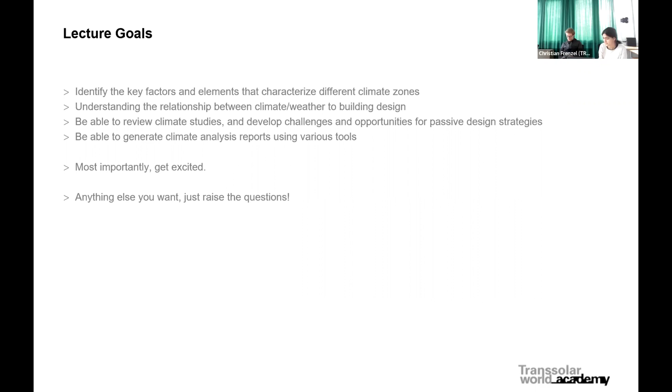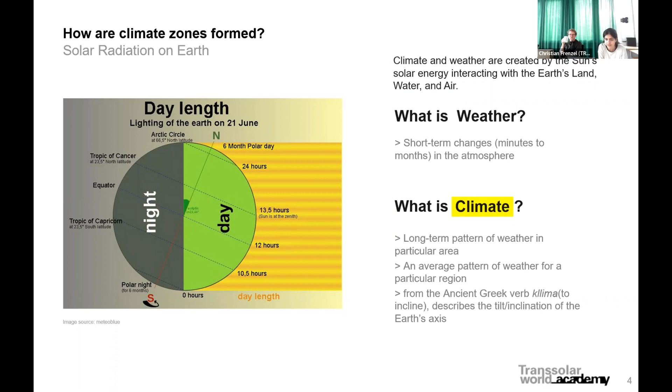Climate is a long-term pattern of weather in a particular area, while weather is a short-term change that happens from minute to minute or month to month in the atmosphere. So basically, the average weather pattern defines the climate of a region.

There are very dynamic factors that influence the climate system. It's comprised of the atmosphere, which is the air, the hydrosphere, which is all the water bodies like seas and oceans, the cryosphere, which is the ice, the lithosphere, which is the ground, rocks, and tectonic plates, and the biosphere, which is the ecosystem. So how the plants and biodiversity affect the microclimates and climate of a region.

To understand climates, we break it down into certain measurable physiochemical values, which are solar radiation, air temperature, precipitation, evaporation, humidity, even population, wind, and pressure.

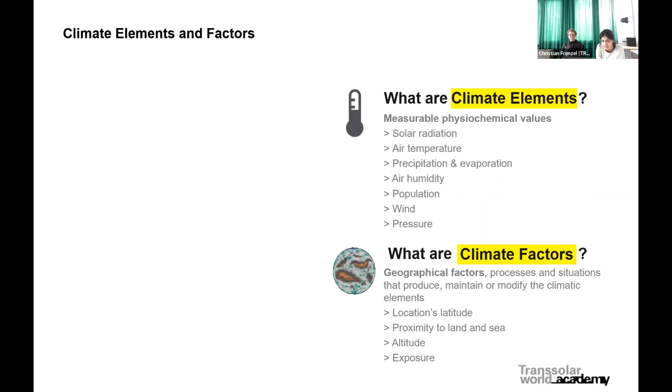When we understand these values, we are able to tell what the climate of a location is like. We are also dependent on certain geographical factors like latitude, the land, whether it's close to the ocean, the altitude, whether it's a mountain area, a desert, or a plain, and exposure to other factors such as whether it's an urban area or a forested area. So we'll take a closer look into all of this in detail.

Based on latitude, as we all know, we divide the climate into tropical, subtropical, temperate, and polar zones based on radiation. For example, there is maximum solar radiation in the month of June, and that's the summer months, and because of the rotation, this is how the climate regions are formed.

The polar regions get less sun, and the regions which are closer to the equator get more sun.

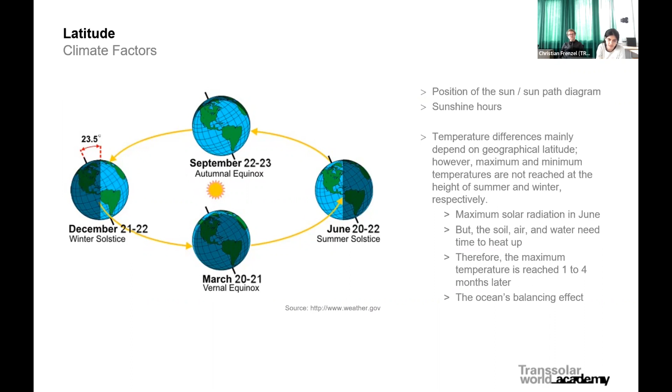In addition to this, there is constant exchange happening between the sea and the land. There is wind generated because hot air rises up after being heated on the land, and cold air flows in from the water, and this creates wind movement patterns which affect the climate.

In addition to this, altitude affects the climate. Altitude decreases pressure and makes the air rare, and it increases wind. It also affects the rain patterns of the area. There are windward sides and leeward sides of the mountain which generate monsoon winds.

Then there are other factors, like whether it's an urban area. For example, if everything is concretized in a city, it will generate a different kind of microclimate, known as an urban heat island.

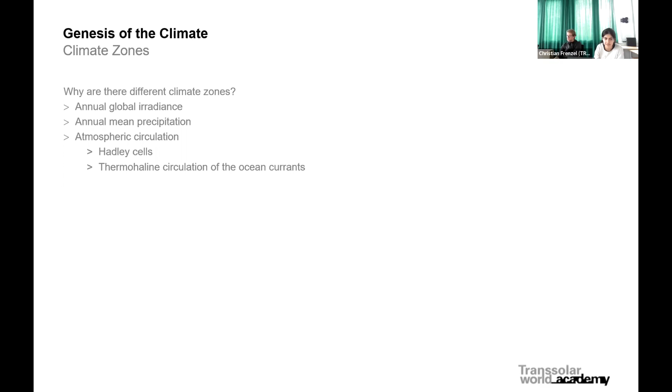So what really generates the different climate zones? We can break it into majorly 3 parts: the global radiation that the Earth receives, the precipitation, so the rainfall or snow which the Earth receives, and the atmospheric circulation, which is the wind.

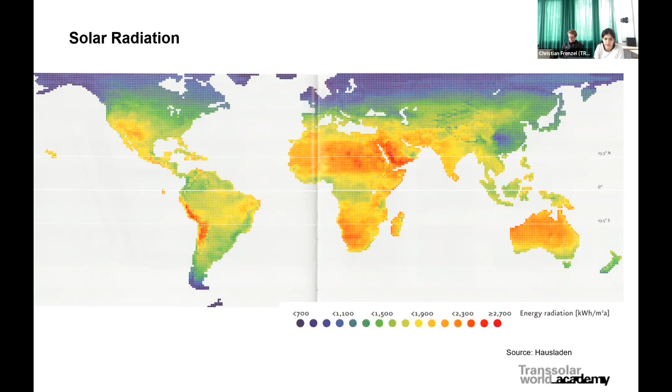When you overlap these 3 parts, we predominantly get these maps. This is the map of solar radiation on the Earth. You can see that close to the equator, it receives the most sun. As we go away from the equator, it gets lesser and lesser, and towards the top and the bottom, which are the polar areas, it's much less.

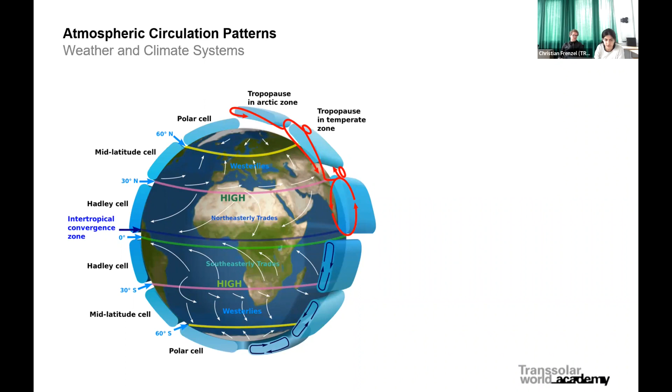Overlapping with that, there are our trade winds, which govern the rainfall, monsoon, and temperature flow of the entire globe. For example, looking at the African continent, you can see how in a section the trade winds flow from the north to the south, and where the warm air rises up, the cool air is always taken in to cover up that space.

In addition to this, there are deep ocean currents which also circulate the temperature in the oceans and seas. The cold water and the warm water flow in a way that also creates wind patterns, and these wind patterns then define the coastal winds and so on.

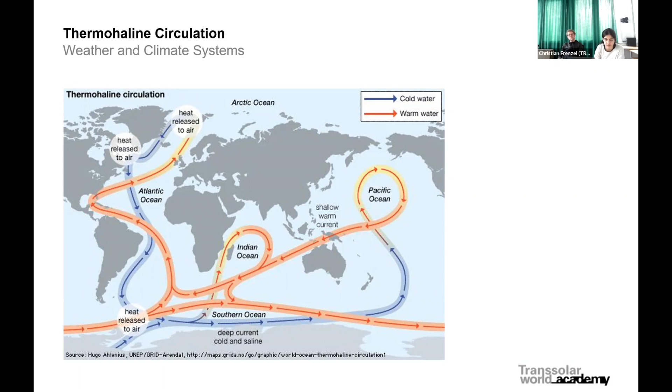So what we have based on all these layers, when we overlap, we get a detailed climate classification, broadly classified in two ways. There are genetic classifications, which classify based on the causes of the climate, for example where it is generated. These are like the Flohn or the Neef classifications. But what we use commonly is the effective classification, which is based on the effects of the climate.

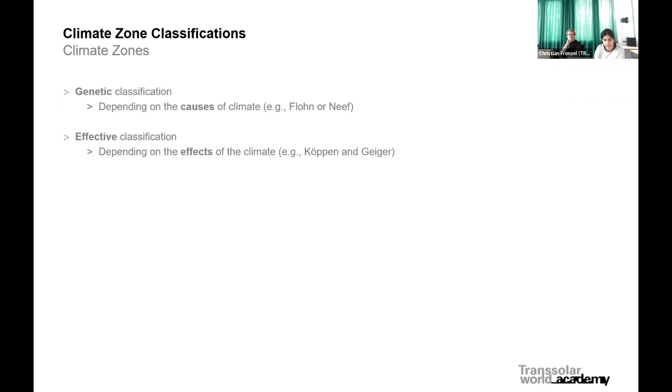So the most common one to use is the Köppen and Geiger, and this is the map of this one. According to the Köppen-Geiger climate classification, there are around 30 zones of climate in the world, from tropical rainforest to arid deserts, to cold with dry summer, hot summer or dry winter, cold summer or cold winter, dry summer, and going all the way to polar frost.

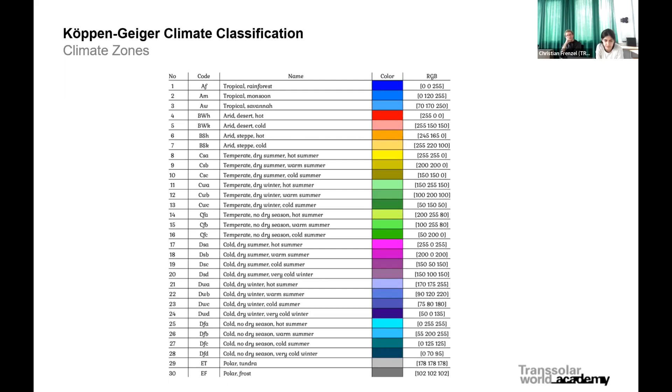So these are 30 different climate zones, and each of them creates very different and very unique characteristics in every possible way. Let's take an example and look at a broad classification. Let's remember we have 30, but just for the sake of understanding, let's take 4 broad classifications: the polar zones, the temperate zones, and the tropical and subtropical zones.

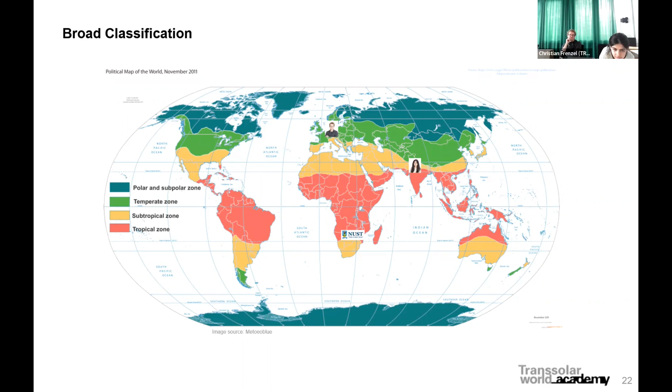So when we overlay all these layers of solar radiation, precipitation, humidity, wind, and atmospheric pressure, what we finally get is something that is a completely different geography, a different vegetation, soil, topography, and it looks something like this. You might be familiar looking at such environments in your area.

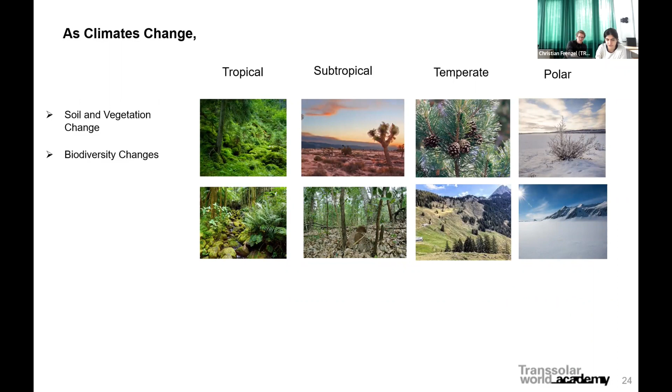And naturally, as these climates begin to change, the soil and vegetation changes. So as you know, in rainforests there are broad-leaved species, and in temperate forests there are deciduous and coniferous species, and so on, which naturally means that the kind of produce grown there, like the food we eat, also changes.

So in rainforests you would find fruits like papaya, banana, pineapples, and so on. In subtropical areas, you would find oranges, figs, dates, and so on, which basically means the food being consumed changes. So the culture, languages, everything is changing from these areas.

This also means that the natural resources available there, or the locally available materials that naturally grow there, are also changing. For example, in tropical areas bamboo grows abundantly, and in most subtropical areas you would find a lot of limestone or sandstone and so on.

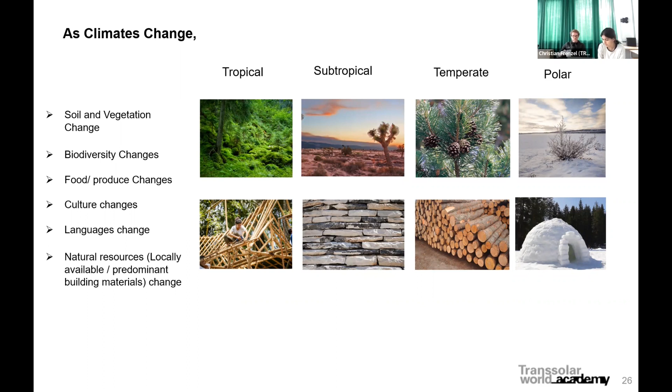And in temperate areas, there is abundance of wood, especially coniferous trees like pine wood or cedar wood. And in polar areas, there's of course ice. So predominantly in traditional buildings, people used to build with whatever was available in their immediate surroundings. That's why you see buildings predominantly made of these materials, because they were right there.

And also something that changes further is, naturally, the clothing. Our body's first response to adapt to the climate is to wear comfortable clothes, which give us adequate ventilation, protection, and so on. So if you look at someone in a tropical area, that's the clothes they would wear. In a subtropical area, they would cover their face and head because it's too sunny. In a temperate area, they would cover their body with a warm coat, and in a polar area, even a thicker coat.

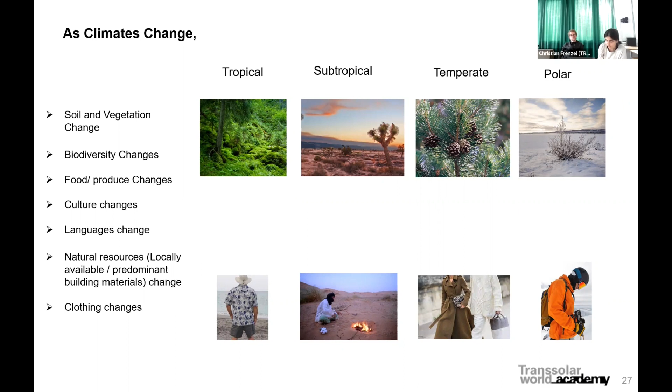So now it's time for your turn, and we want to ask you, how do you think architecture changes? And the hint is, if you look at the clothes, you'll be able to tell how the architecture changes. Please raise your hands and let us know some answers, or some thoughts or your own kind of experience.

I think it's important that we're talking about our general understanding. I'm not sure if it was you or someone else, but when you came here to Germany, it was winter time or even October time, there was a kind of hard change in clothing, I could imagine. Yes, true.

Would anybody like to take a guess or take a shot at answering? If I add to it, the interesting thing is, everybody here has this all-season kind of clothing. In winter, everybody's getting super insulated with a big jacket. And I remember a very, very huge jacket in your case, because coming from a very warm climate, the expectation is also different, or the experience of what someone is used to before when the season changes. Yeah, and here in winter it can really drop down to -10, and even extremes of -20 degrees Celsius.

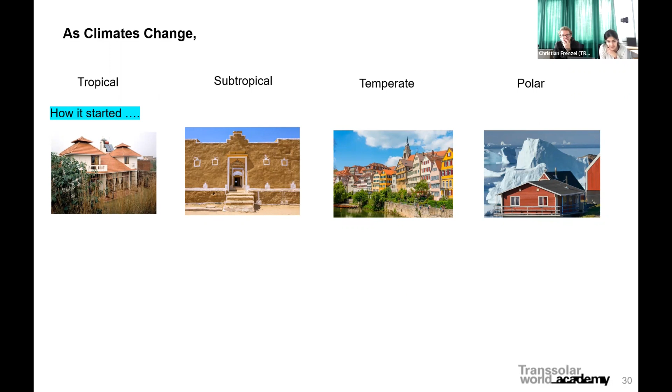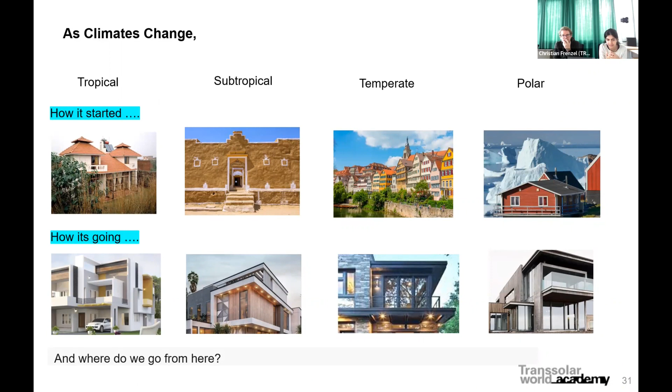So based on these principles, this is how we started building climate responsive design a couple of centuries ago, and this is how we're going now. Everybody is just building the same, whether it's a tropical climate or a subtropical temperate climate. These are actually real houses from the same locations. The question is, how do we go from here? If we are creating the same conditions to live inside and insulating ourselves completely from the outside, how do we do this better? How can we understand the climate and respond to it in a more conscious way?

So the first step we can begin with in any project is a site study, which basically means understanding the climate conditions of the site. The components of this would be to understand the sun angle of your location, what is the solar radiation, if there is any immediate shading from tall buildings or trees around, understand the temperature, precipitation - for example if it's a rainy area, if it snows, or if it gets relatively less rain, because this would inform how you design your architecture. Also if there's humidity in the atmosphere, what is the wind direction, what are the temperature differences, and so on. Then you would raise the question of how do you translate this to design.

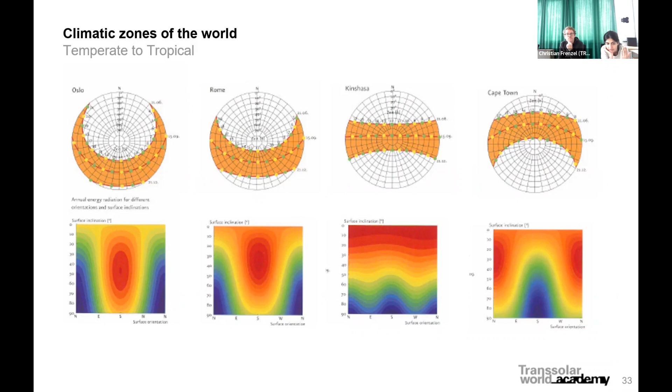So what does this mean for a building? Imagine you were standing in this kind of sun, you would automatically raise your hand and protect your eyes, right? So if it's coming vertically, you would need vertical protectors. If it's coming horizontally, you would put your hands horizontally over your eyes. So the building works in the same way. In certain places, when the sun is coming from the top, you need horizontal protection from the windows. And if it's coming from the front, you need vertical protection.

So this is how a site study works. And all these inputs can help you design with respect to climate. So the sun angle will decide your building orientation, where your larger facades are facing. The solar radiation will decide how much window size you want to give on which facade of the building. And the precipitation would decide your roof angles and how you channelize water on the roofs of the building. And then humidity would help you decide the breathability of materials, whether you want to allow humidity or whether you want to really ventilate it, and so on. And then wind would also help you decide the protection, where to put wind protection, and so on.

And then the day and night temperature differences would help you decide whether you want to utilize those differences with respect to thermal mass, to understand that if it's warmer in the day and colder at night, maybe you want to store the heat of the day to use to cool the night. And of course, if there is a local mountain or a lake or a water body, your site would again respond to these conditions. And if there are trees, they could act as shading and wind buffers. And if it's a very cloudy place, this would also decide how much daylight you get into your space, and the window sizes, and so on.

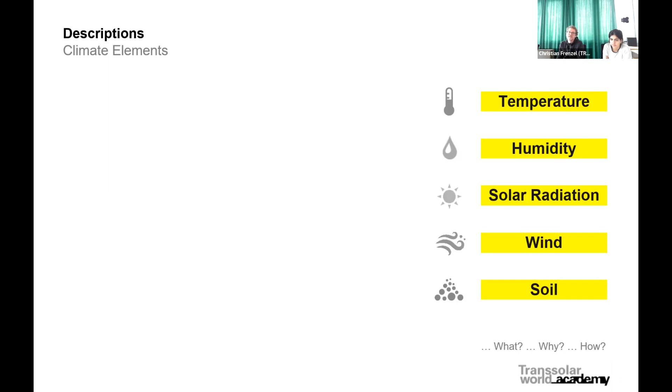So the part - we just highlight here some key elements which we are really interested in, even before we talk about architecture. For us, it's relevant to get an understanding of the boundary conditions, as I mentioned before, and that's temperature in one place, whether in degrees Celsius, Fahrenheit, or Kelvin. For us, it's interesting to get an understanding and a sense of the outdoor air temperature, not at a certain point in time - it's important over a longer period to know how air temperature is changing, how it's varying during daytime and night time, and then also, based on this in relation with humidity and cloudiness, to get an understanding of sky temperature influences.

And ground temperature and dew point temperature and so on. I will get to this later in more detail, what is behind it. Because the question is for us, when we know how temperature is changing, what is the kind of increase during the day, during short time periods, this will tell us a bit more about what strategies might be really efficient and might be really worth considering in passive cooling strategies and so on.

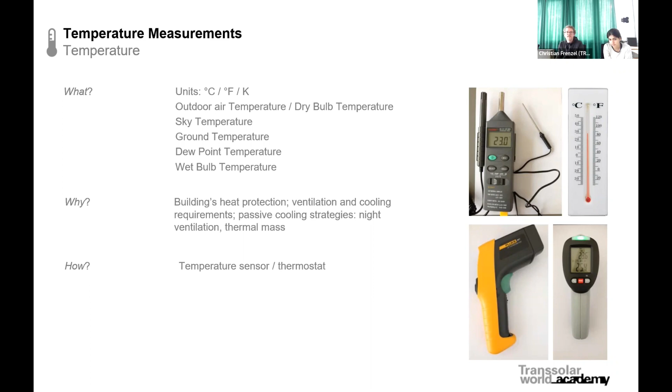For us, as climate engineers, we relate to given data, measured all over the world, which is then distributed for energy calculations. But we are also very interested if there is locally more actual data from the past year or past two years, so that we generate a kind of overlay, because we realized that in past years and decades, temperatures were significantly changing, and also very dependent on if it's in a city, or where it's located in a city. If it's a part of the city which is ventilated well from outside, that is something which in a site study is very important for us.

And that gives us a kind of initial idea - when the summer temperature varies between 30 to 46 degrees Celsius, is there really a potential when we think about our expectation for the interior climate? I think everybody has a kind of expectation of what the interior temperature in a space should be. For example, in Germany, we would say we'd like to stay between 20 and 26 degrees.

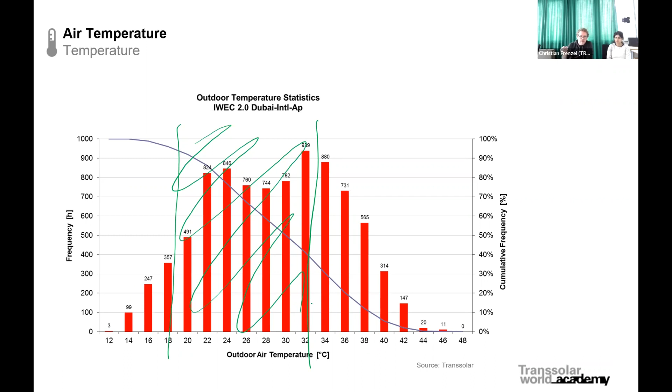So that's just an indication again. Here we were a bit more critical in this study, where we said you have a cooler side in winter where you need to think about how to maximize passive heating. You have a directly comfortable range highlighted in green, where you could be directly outside, which is also a lot of time. Then you have potential times, considering more conventional climatic conditions inside up to 26 degrees Celsius, shown as the red side — more or less active cooling, intending more conventional conditioning solutions.

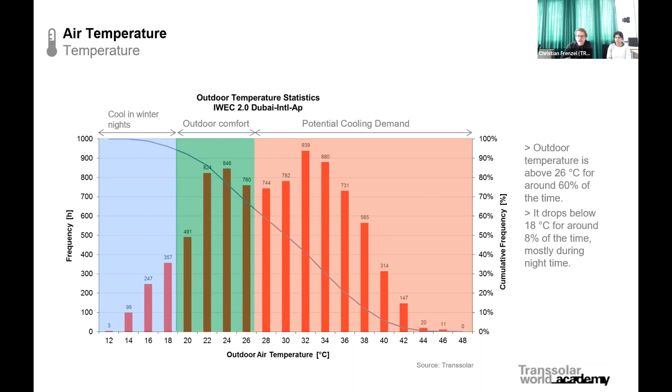Our intent would always be to extend the comfort range beyond 26 degrees. We'd really like to develop solutions and ideas that feel more comfortable even up to 28 to 30 degrees Celsius. We'll come to that later, and further material regarding this.

So sky temperature, and I think in Dubai, especially in climates where you have a lot of sun and very low amounts of clouds, there is the sky temperature, which during nighttime is even generating situations where you really freeze. If you go to the desert, you have a clear sky - the sand is very hot during daytime, but during nighttime it drops significantly because the sky itself has a very cold temperature. We call this the long wave radiation effect, where cold surfaces radiate coolness onto our human body and the environment.

And that has a significant impact. If the sky is very cold, temperatures drop down very low, so that you need to wear a kind of suit, or have a blanket or carpet on top of you to cover your body in order to avoid freezing or feeling very cold.

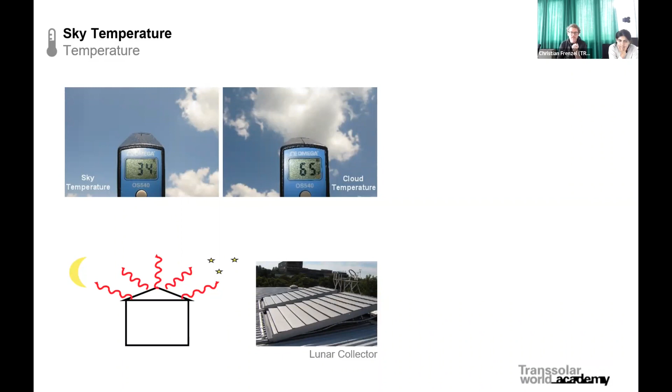So air temperature and sky temperature is one part of the temperatures we often talk about. What is also very important for us is the humidity in the air - relative humidity. I know you now have rain season in Zimbabwe or your region, but the humidity in the air also has a significant impact on how we sense comfort and the potential usages of water and air.

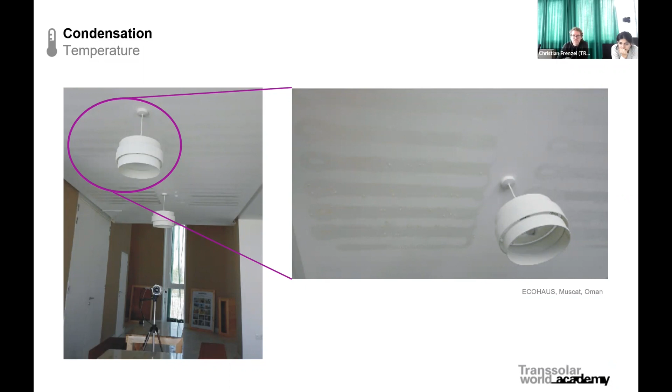This is quite simple in principle, though not so simple anymore because there's already a lot of technology involved in having fresh water and pressure to really generate these fine water droplets. But there are even simpler solutions you all know from your own homes, like when you're sitting outside in a restaurant or cafe, sometimes there are systems which evaporate water into the air. It's a similar principle, but there are details where you could do it even better than conventional solutions.

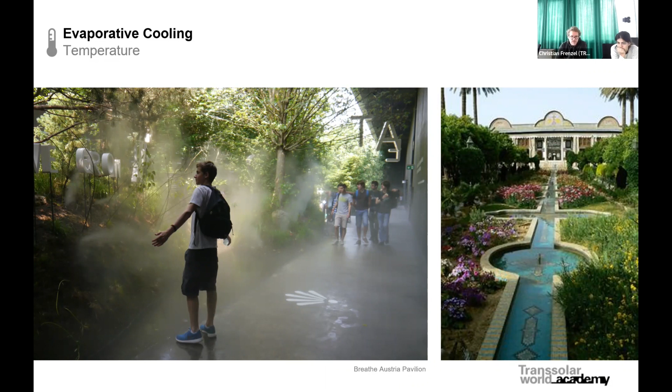Okay, so the solar, we discussed the cloud. I showed you the measurement of the cloud, and the cloud is somehow an in-between layer, so that when the sun strikes the cloud, a lot is reflected, but some parts are also transmitted and absorbed. I think this is just important to keep in mind.

We have the high intensity sun, with up to about 1,365 watts per square meter of extraterrestrial power, which arrives on the outer shell of the Earth. But when it goes through the atmosphere, it is reduced, and typically we end up at around 1,000 watts per square meter. When it passes through all the boundary layers, some parts are reflected again from the Earth to the sky, but then there's this greenhouse effect, so the sun's energy comes in and stays in our more direct environment. The Earth itself emits heat again through temperature differences to the sky. These are the main forces at play.

So the solar radiation, we call it shortwave radiation. We have the long wave radiation, which happens between our ground temperature and the sky temperature. These are potentials we need to consider in architecture, in our climate responsive designs.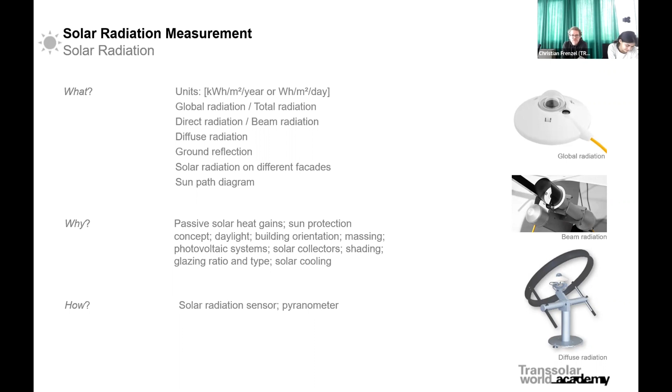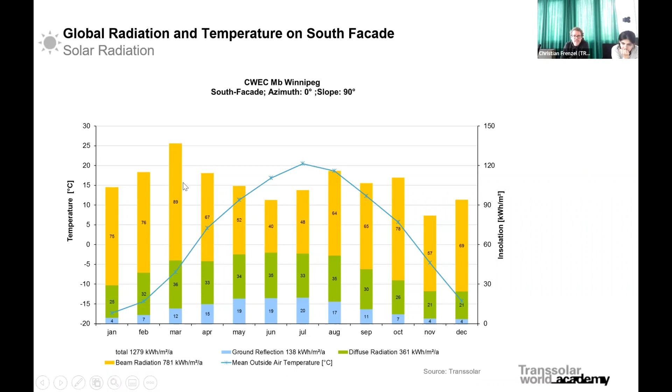Here we have an example from Winnipeg, Canada, which is very interesting from a climate perspective. It has super cold winter conditions and warm summer conditions, but almost all year you see the solar radiation potential is comparable monthly, shown here in kilowatt hours per square meter per month. So even though it's extremely cold and gets warm in summer, with a very high temperature change from -40 up to plus 30 or 40 degrees Celsius, which is extreme throughout the whole year, it allows using the sun as an energy source even in the cold winter seasons.

Okay, and I jump over. I think I already covered a lot of this stuff. Oh, wrong direction.

Just to mention here, we don't need to dig too much into it, but according to the sun path, how the sun moves around the buildings and the site, there might be significant differences in facade orientations. For example, the northern facade here in Winnipeg gets very low amounts of solar radiation. But if you go to the south facade, it has almost the whole year an equal solar exposure. If you go to east and west, you see that it's seasonal.

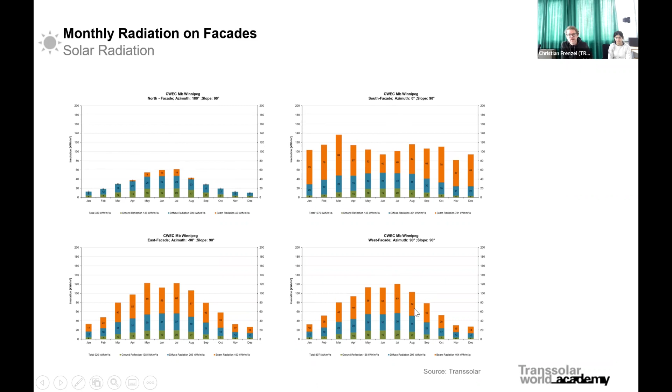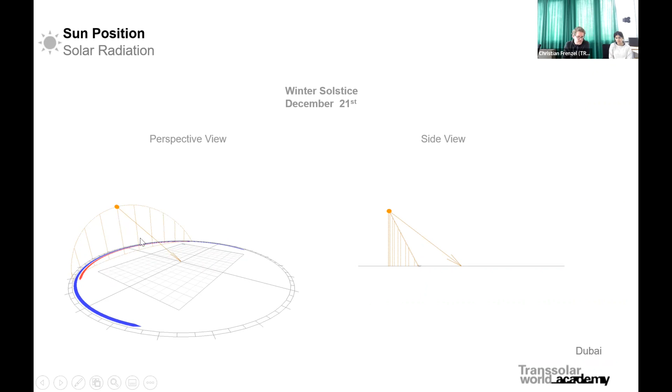Okay, I jump over it. It's like it varies from location. It varies if we go to different locations.

We have here indicated for high sun angles, June 21st, Oslo, Rome, Bilma, Kinshasa, and Cape Town. You see that the sun paths are extremely different. While in Bilma and Kinshasa, getting closer to the equator, you have quite high sun angles in mid of June. But in other locations, like Cape Town or even Oslo, the sun path is fairly lower, and it's coming also from different orientations. We should not forget that there is a north and a southern part where the sun comes during noontime from a different orientation.

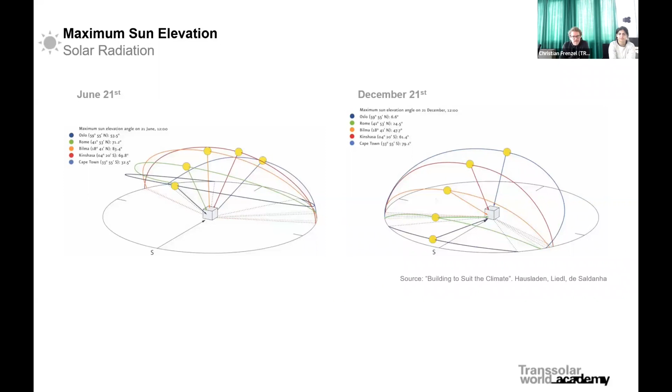So then we have humidity as a topic. We have absolute humidity, which we can measure, and relative humidity, which considers how much humidity is relatively available in the air. That is the kind of sensation we refer to when we talk about humidity in indoor environments - we always talk about relative humidity, because this is what we sense.

We sense relative humidity if it's in a comfortable range. It varies, but comfortable ranges are defined between 30 and 60%. That does not mean that above and below is uncomfortable, but there's a kind of intention to bring the relative humidity into this range. It's strongly depending on the air temperature - the higher the air temperature, the lower the relative humidity while having the same absolute humidity. So if you change temperature, your relative humidity is also influenced by it.

So this brings us to a very important chart, which we are showing often in projects. Every dot represents a point in time of the year. You see the air temperature, the outdoor temperature, on the x-axis, and the absolute humidity on the y-axis, and every dot is a point in time of the year from the measured weather data.

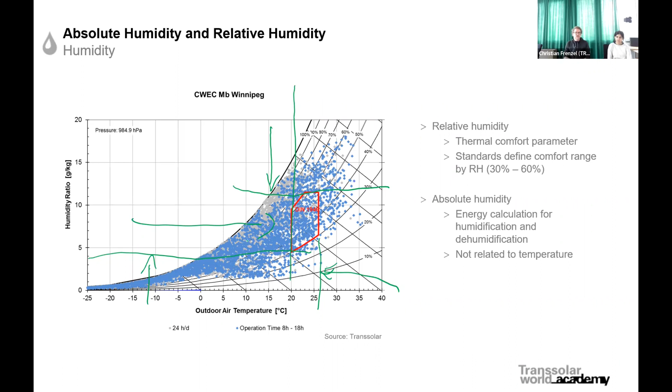So what I want to say with this is, don't try to overload your solutions. Find a good and appropriate solution which solves it for 90% and 95% of time, not 100%, because this is per definition not possible.

Okay, then we have another topic, which is wind. Wind is very important for us for architectural solutions, and also for master plans, for example. You see here some traditional ways of constructing where you have these kind of chimneys or wind catchers, which allow bringing in or extracting air by the overflow.

It's like, in today's time, you build Formula One cars with very aerodynamic solutions with spoilers, and the spoiler presses the car down onto the ground. We are building up so many technologies and solutions for cars and other stuff, because everybody likes to get a nice car. In former times, at least - I hope in the future it's not like this anymore, maybe we have a more efficient bicycle or whatever.

But honestly, in architecture, we had these principles. We used the forces of wind already in a very intelligent and clever way. You see here this wind overflow element at the top of the building. The intention is that the air flowing by generates an underpressure, so it takes the air out from the building below. This force is used to move the air even through a duct below the building. It's a passive way of replacing a fan - we don't need a fan while applying this kind of system.

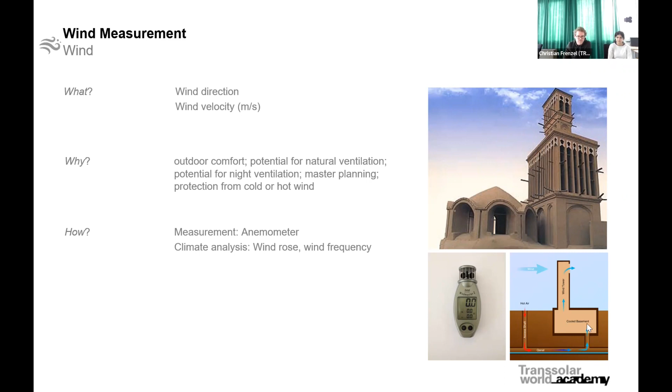And for sure it architecturally has a high impact, because you have a chimney standing there, and you need to solve all the airflow solutions in the architecture, not in the mechanical ducting.

That's why for us, if we talk about efficient architectural solutions, we're also interested in the wind situation - how much wind, and where does it come from? Is it coming from west, from north? Is it changing according to the season? Is it changing according to the time of day? These are all initial boundary conditions which we need to study.

I'll jump over it because we're already running late. Similar things apply to the property of the ground where we are building. What we're interested in is the composition of it - is it sand, is it earth materials like clay, do we have water there?

Because with modern technical solutions, we build these chiller systems with fan units, and what we do is dump the heat into the air. The air is a very fast reacting element - even if you breathe with your mouth, you feel hot air coming out of your body in an environment. It's very fast reacting - I just take air in and breathe it out, and the air is warm.

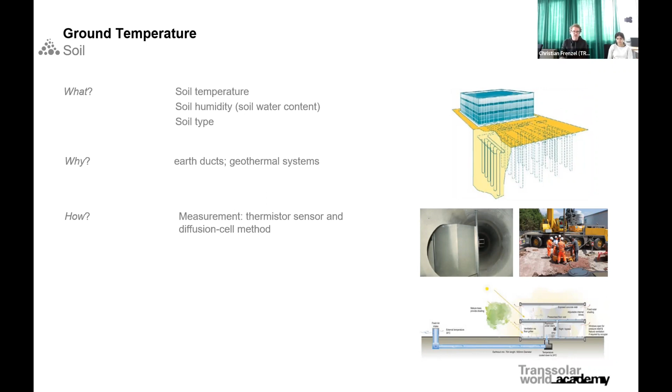And this is why we're interested in the ground also, considering it in the active and passive cooling strategies.

Similarly, in Toronto, the average condition is at 8 or 9 degrees Celsius. So even if the exterior fluctuates between -40 and maybe plus 40 degrees Celsius, in the ground you have a very stabilized condition.

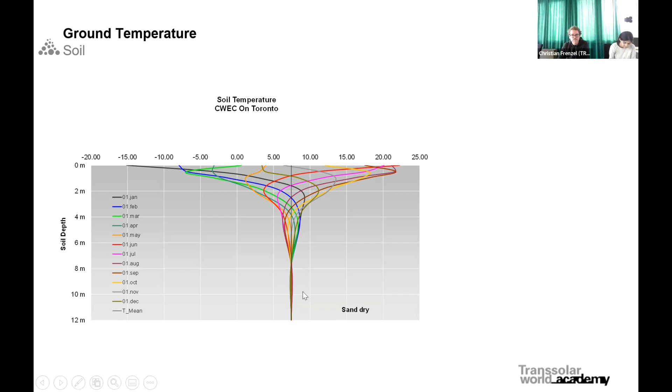For you, I think it's important that after our talk today, maybe you already did this for other stuff, there are web-based tools, and in the web there is data available for weather. There are also tools available. At the end of our presentation we have a link to a tool which I find very interesting and nice to use in the first place if these questions come up for you. But we put here some sources and examples for you also to look at.

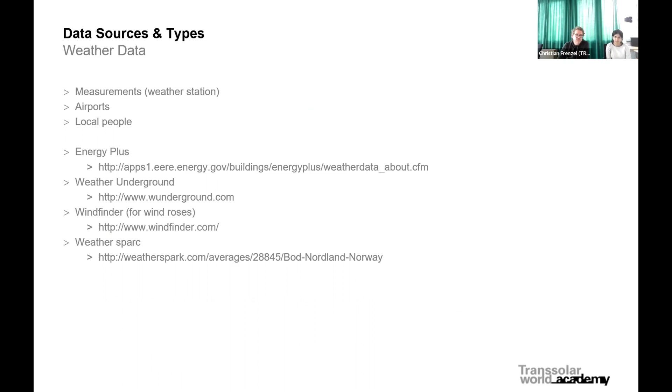One thing we just wanted to mention: when we use data for our energy modeling, often the database comes from the airport or some publicly available locations where you can get data, which is then treated by universities or public institutions in order to generate weather data for energy calculations. Important is that, as I mentioned before, it can vary significantly from location to location, from the airport to the inner city. You see an example here.

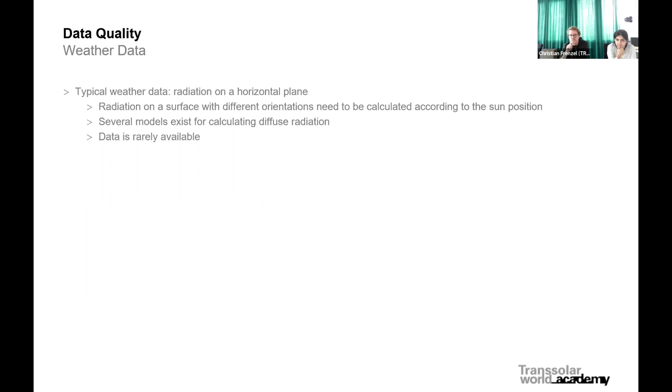Okay, I'll jump over data quality—we anyway sent this, you can see it again. Important is that the climatic data consists of the main drivers for us: temperature, air temperature, humidity, solar radiation, and also wind, and ideally that we know even the wind direction. This is often not given, so look at the data very precisely in the first place, look at what is available, and if a dataset is not providing you wind data and so on, look for other data, just so that in your evaluations you're really considering the important drivers for your boundary conditions.

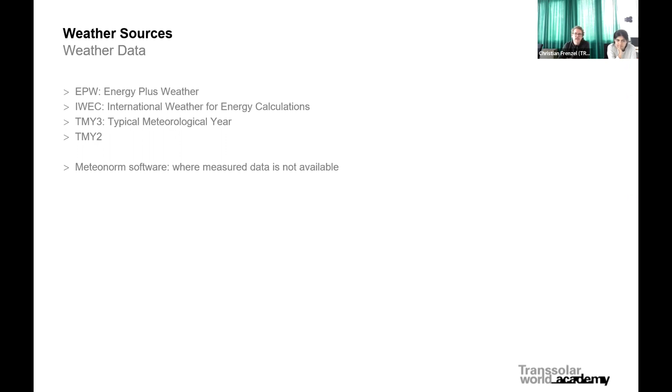There are some sources which you find online anyway. If you look for EnergyPlus, for example, you find a big database which already incorporates sources like EnergyPlus, IWEC, TMY, typical meteorological years, and you can use these as a starting point.

So very important also is what affects human comfort. I've shown this picture of humidity, air, and so on. I think what is important for us is the conventional definition of comfort—it's very different, what people relate to comfort as a criteria. There is an operative temperature, which ASHRAE, for example, takes into consideration. The operative temperature is an indicator that takes just air temperature and surface temperature of your environment, and it was derived based on standardized boundary conditions for what would be the human in the space, with very defined criteria.

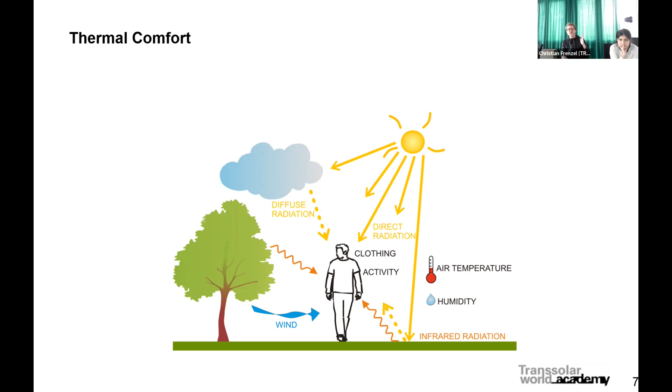This is why we say good architecture, or let's say good solutions, not architecture only but also technical solutions, look more holistically at the boundary conditions. So what is the activity, humidity? We even talked about Ayurveda as a kind of comfort element. What is the coloring you see? Even color has an influence on your human body, on the blood flow and everything, the availability of daylight. So it's important that you can look at a much more holistic boundary condition than just looking at, for example, operative temperature as a kind of indicator of comfort.

This is just what we would like to address with this chart. We see a lot of potential in traditional ways of building, and if we modify them with the modern technologies we know, it's a modification, not a replacement of the principles. I think we could find very interesting and good solutions.

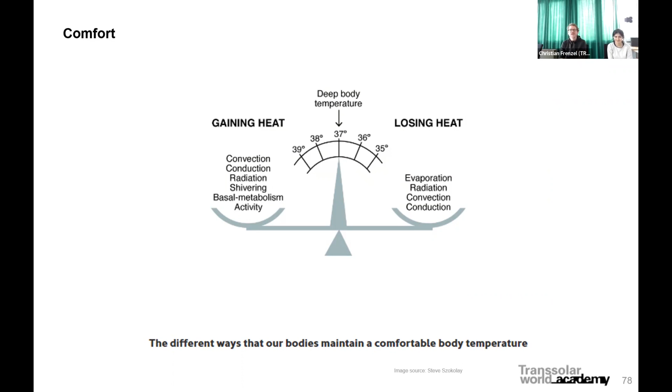Anyway, comfort has so many aspects - how much our skin can evaporate, losing heat and so on, our temperature, our blood flow, what we are eating and so on. I learn also a lot from other cultures and discussions with colleagues. So just keep it in mind, there's so much more than just the temperature itself.

And for the end, I have 2 examples. I'll take another 10 minutes, and then I hope we have a little bit more time also for your questions. We are extending a little bit because we started a bit late, but I would like to give you 2 examples. I'll jump over a little bit faster now, where we applied this discussion, these elements which we discussed previously.

Here in Kampala, this is the Aga Khan Academy. Just to give you an idea about how can we, even based on the study of the outdoor conditions, give recommendations.

Here in Kampala, if you look at temperature and the temperature change, you see it's rarely going in the range of 30 degrees Celsius on the upper side and rarely going down to 15 degrees Celsius. So it has an enormous potential for a kind of natural ventilation, and also to think about how this can passively be used.

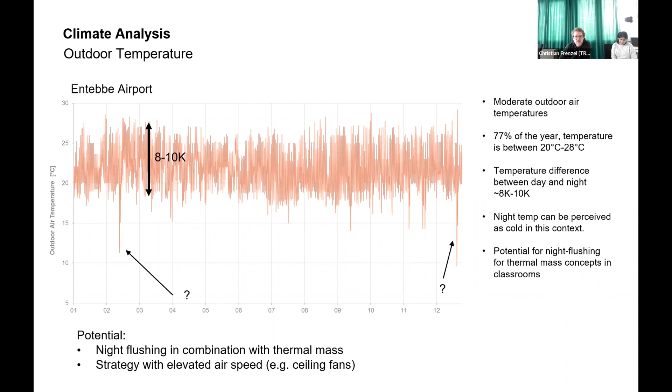That's why we try to intensify the usage of night flushing, night and day flushing also if it's appropriate, so that we are allowing for openings in order to cross-ventilate the interior of the space. If you look at temperature and humidity, there is a kind of challenge that the humidity is very high, but the temperature seems to be very good, while humidity is quite high.

So if we are talking about space conditioning systems, we have to keep that in mind - we cannot just cool down a surface, or we get a condensation risk, for example. Then on the other hand, relative humidity, as I mentioned, is quite high. The rainfall, almost the whole year, there's some rain coming down.

And there's also a kind of change in relative humidity between day and night. The good air change of the inside of the space is intending really not to have humidity staying in the space. It's a kind of movement we need to generate - we need to flush out humidity of the interior of the space.

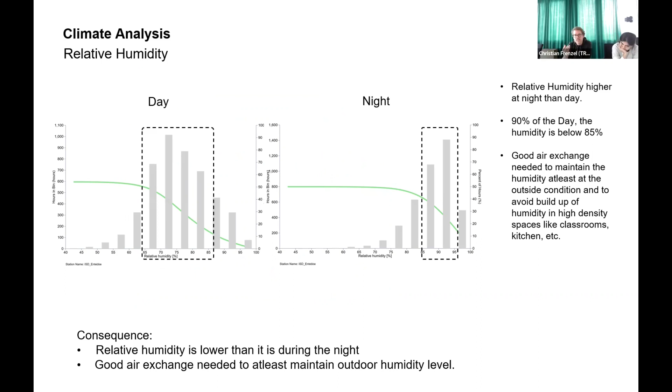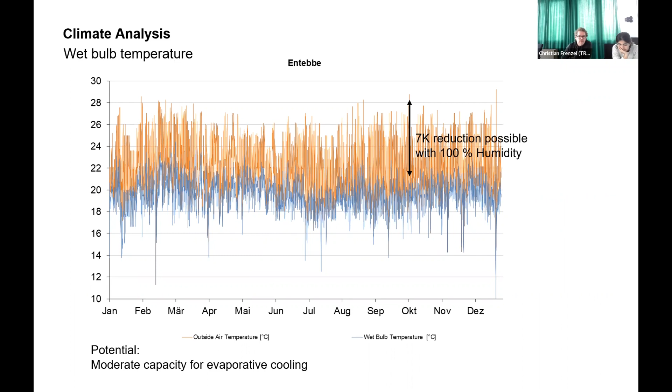But still, even if it's very humid in this climate, there's still a potential by humidification to further humidify the air and reduce temperature. It's again not so - temperature is really not bad here, so I'm even wondering if we really need to humidify and to think further about this.

Then the other topic is the shading. If you look at the sun path being so close to the equator, the sun is coming from north and south side according to the season, and it's more or less just from east to west, going above the head, let's say, of the human. So we need to think about how can we maximize shading and effects by architecture and just apply movable shading parts where it's required.

In this case, an example is that just by an overhang on the north facade, which is purely like 30% from depth to height of a window, it already significantly reduces, let's say, solar radiation on the window itself.

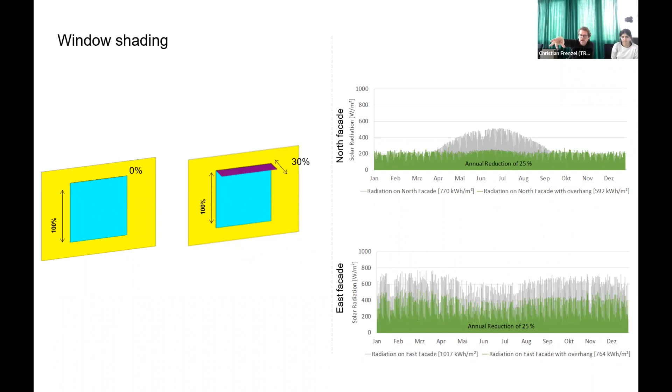On the east facade, there's lower reduction, but for most of the year you have sun striking the facade. On the north facade, you see shading only in summer periods. So you'd think about whether to extend shading further to reduce solar radiation striking the window from that side. For windows and shading strategy, overhangs are very efficient for north and south facades. For east and west, due to sun angles coming from lower directions in morning and evening, you'd need something movable, a different kind of shading structure.

So the other topic for such a climate is insulation and facade properties. To insulate is not really the solution — you don't need to dump a lot of insulation material on the facades. It's more the question of how you can protect from a lot of solar radiation.

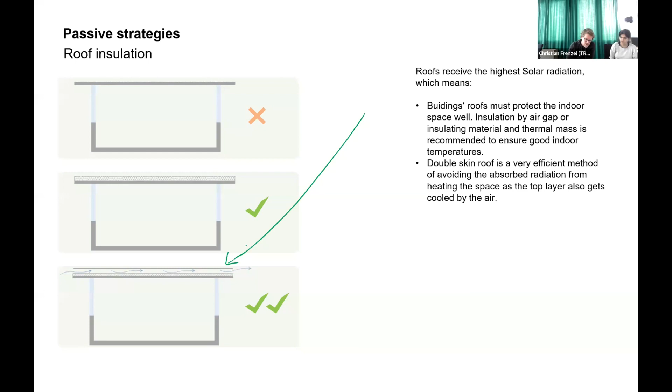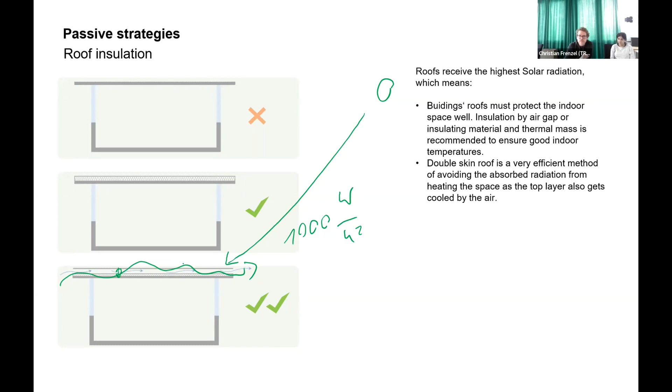The roof itself you can insulate, but you could also lift it and build a double layer solution, which we see often in tropical or subtropical climates, trying to take the heat out where it strikes the building. When the sun strikes the roof with maybe 1000 watts per square meter, by detaching the lower part of the roof from the upper part and cross-ventilating it, allowing air to flow through, we generate an increased heat exchange. We're flushing away the heat at the roof, protecting it, so the lower roof can have less requirement for insulation and heat protection.

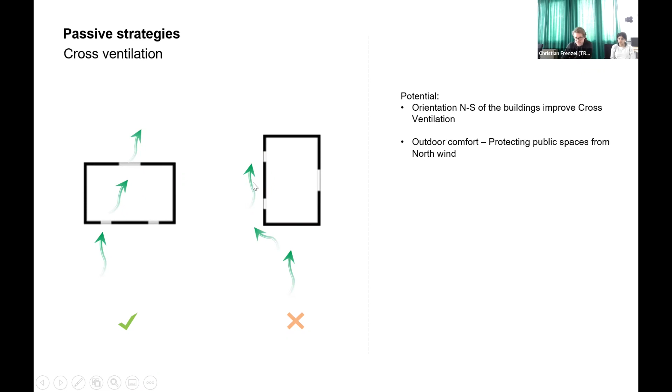A lot of sun means a lot of potential for active energy production, like solar thermal and electrical. Then there's the wind topic — if wind comes from certain directions, we might use it for space operation and conditioning. Cross ventilation is something we appreciate. If you open up facades, we allow for porosity, but if wind is warm or not intended to be useful, you can block it by letting it flow aside the building — blocking to the south, opening to east and west, for example. In combination, like the Damascus example from a former lecture, we're interested in using air movement and sun as a heat source to naturally ventilate buildings, especially in climates with a lot of sun and moderate to higher temperatures.

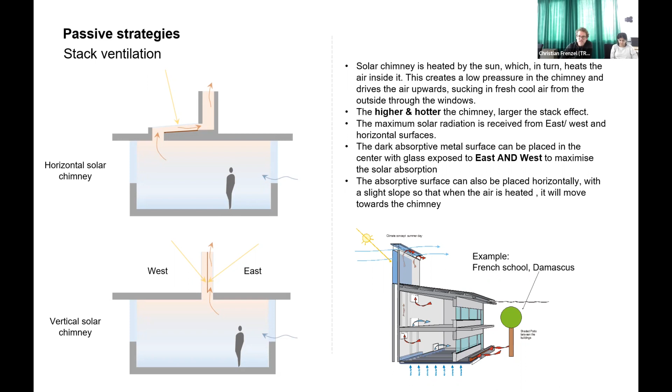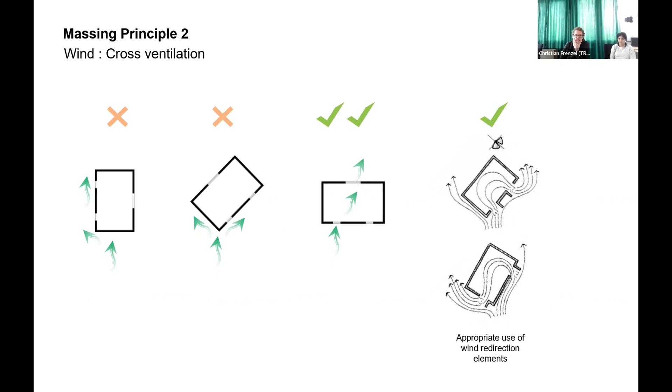Then there's the ventilation topic, where we deal with strategies to cross-ventilate. We could even orientate buildings, as seen in the middle, to generate intended airflow. That goes along with positioning in a master plan — how far away do we position buildings? We know that at a certain depth, even if air flows over a building, it falls down into a courtyard. We're interested in improving ventilation of cities and master plans, so air isn't just flowing over us but also going into passages and corridors to generate natural ventilation. There are principles against stacking buildings directly after each other, instead positioning them to the side, so air can fall down between all buildings, not only through the main corridor.

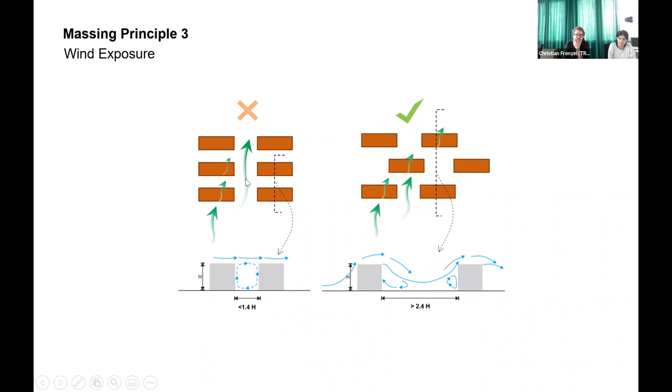This goes further, and we can look it up again with a bit of explanation and examples. What's relevant for us is also acoustics, in a way - if this impacts architecture, do we need to react with openings? If we push for natural ventilation, is it possible, or do we need to think about cascading the airflow so that we protect from noise, having a longer path for the air movement in order to really protect from noise and deal with it?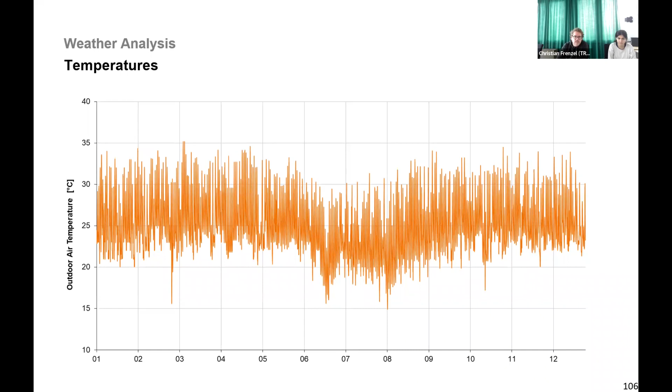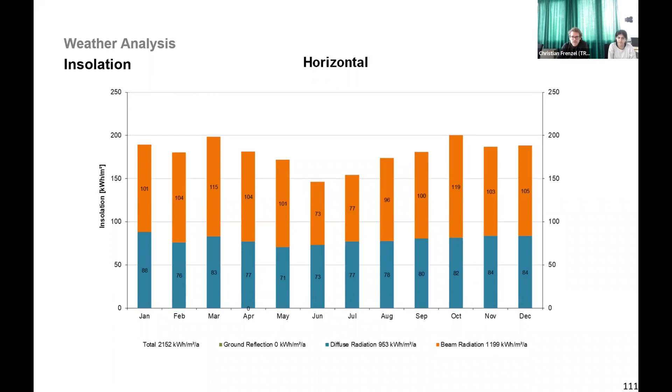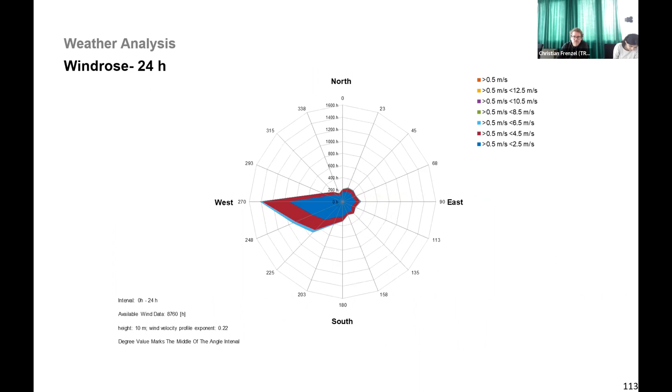I'll jump over the temperatures - it's different to Kampala, but here in Kinshasa it was a bit higher. Anyway, with sun all year round, we have year-round potential for natural ventilation during certain times of the day, so there's interest in bringing exterior air into the space. The sun path is quite similar, with very high sun angles due to the closeness to the equator. We have direct and diffuse radiation almost the whole year, fairly equal on a horizontal plane. Humidity is high as before in Kampala, and wind is mainly driven from the west, so we're interested in how we can intentionally bring in air from the west side.

The building is a residential building we studied, and there was a lot of discussion about the amount of window openings, the amount of shading, and the distances to neighboring buildings, so that besides protecting from sun, we also get good daylight quality inside. The intention was for the south side to have more openness, more openings, overhangs as a solution, but on the west side to have this porous brick facade, which also protects from lower sun angles due to the depth of the structure itself.

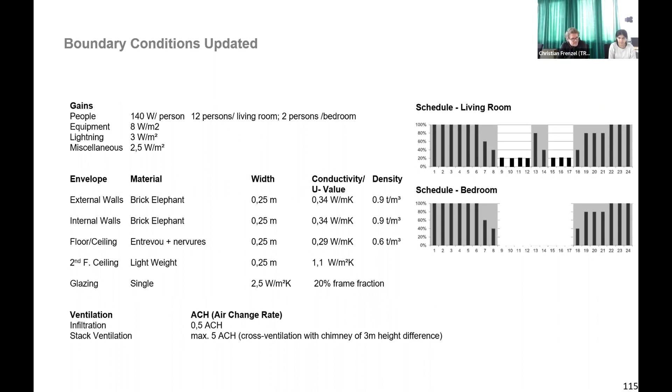You also see here the chimney - the intent was really to naturally ventilate the building. We discussed a lot about insulation, and we needed to generate awareness from the client and the architect to say we should not overload the building, and rather keep it simple. The challenge was to get away from our concern that we take solutions from Europe - from Switzerland or Germany, for example - and apply them one-to-one in this climate, which is a waste of material, energy, and resources. We have this challenge of needing to convince people that we don't need it.

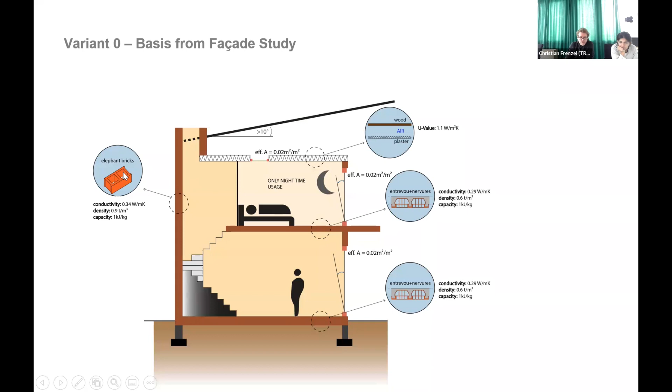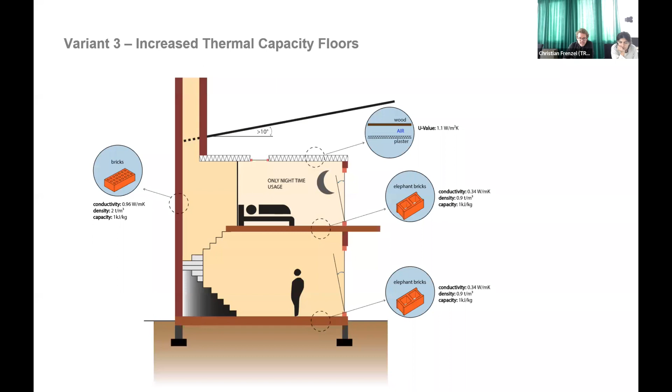So what we did here is a material study: how can we maximize thermal mass effects, natural ventilation, and passive cooling? Here's an example - this was the base case with an insulated roof, and facades with lower conductivity using hollow elephant brick elements. The question was: can we increase ventilation by increasing the chimney? Then, can we change the bricks to higher conductivity with more thermal mass? Can we increase mass in the ceilings by integrating elephant bricks? And can we reduce insulation in the roof by having a double layer of roof, which protects the lower layer from direct sun exposure?

We talked about fans for natural ventilation to increase air movement, because the worst case is a day with no air movement, hot temperature and high humidity. Due to air movement, the effect of temperature and humidity is reduced, and we sense it as comfortable even if it's humid. ASHRAE has standards for this, so you can evaluate the impact of intentionally increasing air movement to improve comfort.

So what you see here is the effect. We started from variant 0, with not increased airflow and less thermal mass, and we increased measures from thermal mass to air ventilation, bringing down the temperature we sense from 33 degrees Celsius to 28 degrees.

I think this is really an amazing way of using passive measures. There are only architectural influences in thermal mass, openings, the chimney on the rooftop, plus ceiling fans which have so low energy consumption, and we are achieving a high comfort level.

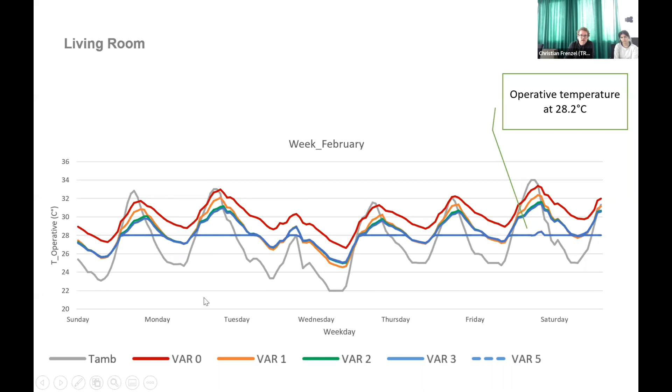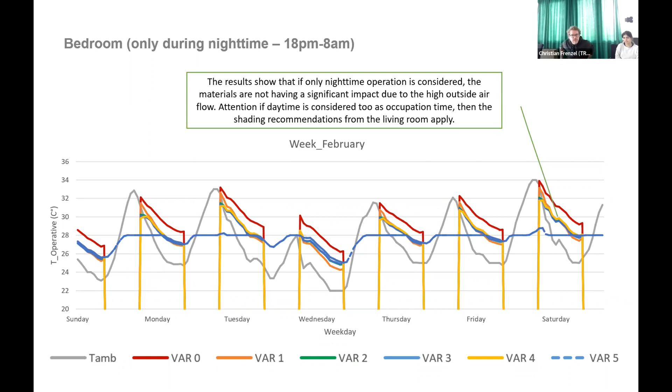But then, even in bedrooms, if they're only occupied during nighttime and the nighttime conditions outside are so nice, why not just open up the facades? Forget about all the thermal mass and increased ventilation, but if you just use it during nighttime and open up the facades, we can reach high comfort.

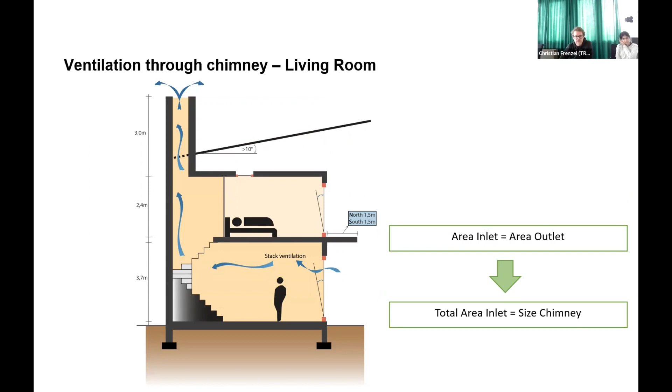So the summary was, we really worked a lot on the chimneys. We really appreciate that the architects took it so seriously, and we gave them an understanding of opening areas and what size the chimney needs to be for the building to perform the way we want. This was quite nice.

And then I have to admit, we talked in floor plans about the rooms, the kitchen, the restrooms, the living room, how many openings and so on. I'll just jump over it.

And then we ended up with some kind of requirements. The fan would be great, thermal mass would be great, the chimney and so on.

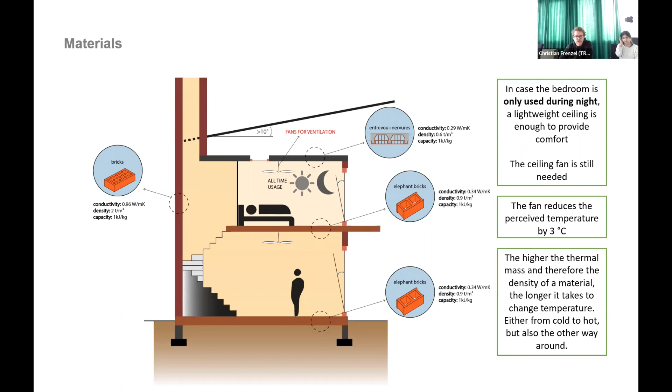And then the client said maybe their consumers would want air conditioning because air conditioning is seen as a requirement. We asked, why the hell do you need air conditioning? They said it's just for principle - if you don't have air conditioning, the building isn't comfortable or high quality. We said that thinking is just nonsense. That's really a big problem, that people think they need air conditioning for comfort.

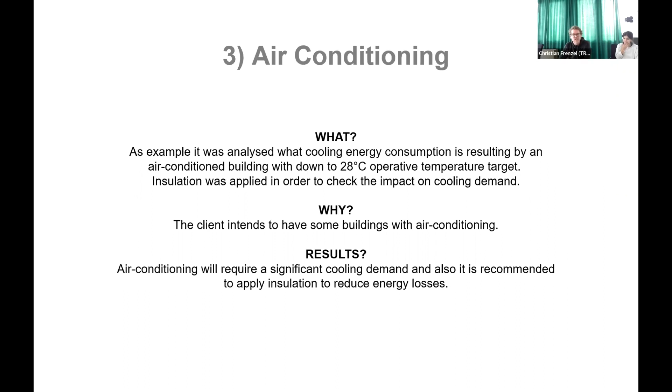And then we tried to convince the client, forget this, minimize it. If your consumer thinks they need air conditioning, it's just energy wasting. We tried to convince them by showing what happens if you integrate air conditioning. Honestly, before this we had almost zero energy demand for cooling - zero. We reached the international comfort level for adaptive comfort, achieving our 28 degrees and even going far below the conventional definition of comfort.

But then the client said, we want 28 degrees with full air conditioning - forget about the effect of air movement, forget about the effect of thermal mass. So we showed them: if you do air conditioning just by putting in a machine that cools the space down to 26 or 28 degrees, you go from no energy to 130 kilowatt hours per square meter per year of cooling demand, just from this kind of system application.

And then we left it open. We told them it's nonsense from our side, but if you do it, then it makes sense to think about insulating the facade, because then you're taking out all the passive performance of the facade. We don't have any natural ventilation anymore, more or less, because the whole year it's conditioned inside anyway.